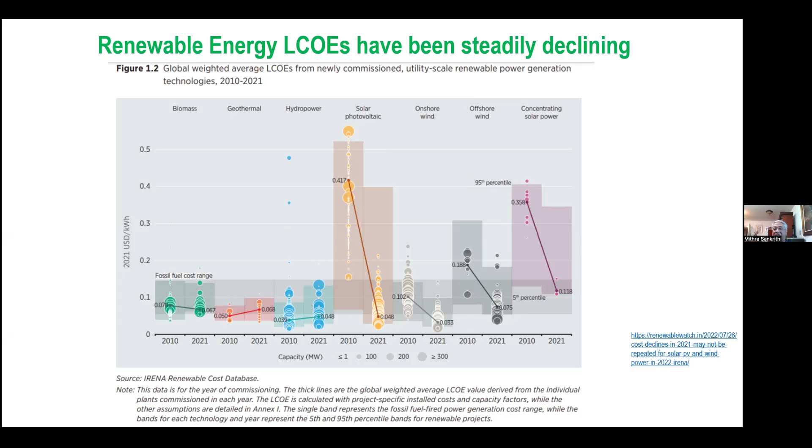Okay, so with that, I'm going to go through a portfolio of 6 of our ideas, and some of them are relatively low risk or modest risk, and some are really deliberately audacious in scope. But I'm hoping that you'll find this thought-provoking, and one of my philosophies, where I'm now a senior citizen, is I really want to inspire the next generation, that's you folks, to think boldly. Don't ever let yourself feel that just because 90% of the people are working on making the next 2% improvement in something, you should hem yourself into that kind of thinking. Think boldly, and you can do great things.

Okay, so the first one is called Super Surya. It's a rooftop solar cogeneration system. The second one, the COS system, or concentrating offshore solar system, is an offshore solar power system. The third one is kind of an interesting niche concept for Arctic communities.

The fourth one is one of these super audacious concepts to actually capture wind energy while thickening ice in the Arctic and Antarctic to combat climate change. The fifth one is a wind energy system, and the last one is a ginormous energy storage system. And we'll get to reasons for each of these and kind of the thought process.

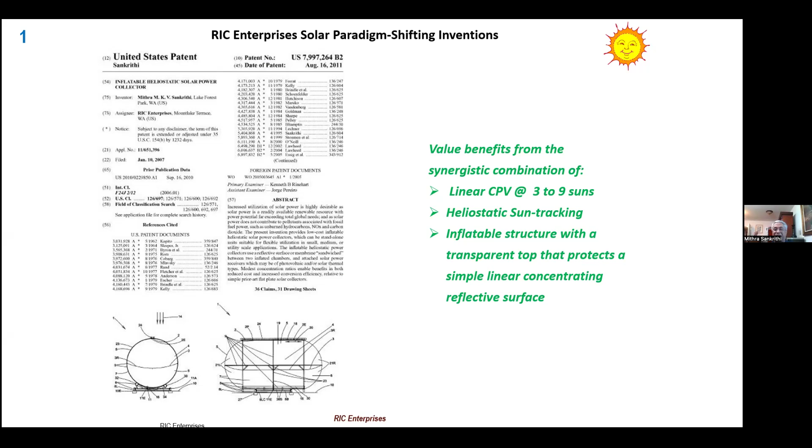And so as an aside, I'll encourage all of you, any of you who have that inventive streak, try and teach yourself how to do that. There's a really good resource called Patent It Yourself, a book that can help you do that if you ever have a mind to do it. And I'm happy to help consult or encourage some of you to do that.

Anyhow, the Super Surya, what's the idea? The basic idea is that solar panels, from the very first chart, we saw that they're already cost competitive. And they're very simple. They have no moving parts. They're very lightweight. They just mount on the roof of a house or a building. They can be integrated with buildings. The biggest challenge with solar panels is their efficiency is really quite low. So a simple silicon solar panel, even with monocrystalline silicon, is around 20% efficiency.

So the sunlight comes in, radiation from the sun comes in at 1,000 watts per square meter all over the world when the clouds aren't blocking it on a nice sunny day like today in Seattle. So that energy of 1,000 watts, if you have a solar panel that's a square meter and pointing directly at the sun, where the power coming in is 1,000 watts, it'll harvest 200 watts. And that's just a fact of life.

So the motivation of this thing is with low concentration and cogeneration, can you increase that harvest from 20% all the way up to 60 or 70%? And how do you do that? So right now, if you ask yourself the question, the energy comes in, what happens to that 80% that you're not harvesting? The answer is it's waste heat at a temperature you can't use. So it'll warm up a little bit, but you can't use that heat.

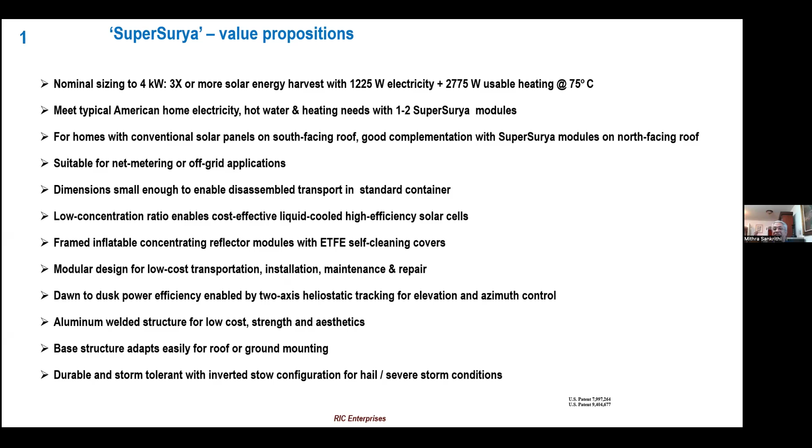So that's the idea. There's more stuff here. We can make this presentation available so you can look at it in more detail later. Let me move this over to this side. We have done some prototype testing, and sorry, I gotta go back.

I have, sorry. This will show my poor WebEx skills or Zoom skills.

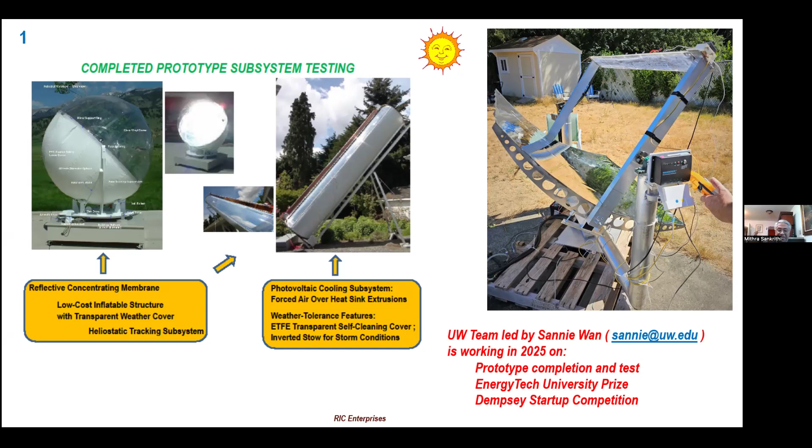Anyhow, so there is a UW team actually currently working on this prototype on the top right. It's headed by an undergraduate student named Sannie Wan, and there's like 5 or 6 students in that team. They're going to complete the prototype, they're going to test it, and they're entering in 2 contests. One is the EnergyTech University Prize, and the other is the Dempsey Startup Competition. So any of you who are interested in knowing more about that, just contact Sannie, and if you want to get involved, certainly you're welcome to do that.

And then in terms of markets, I don't want to belabor this just for the sake of time, but there's significant markets for this all over the US as well as all over the world. And where people conventionally think of solar as, oh, it makes sense in Arizona, but it couldn't possibly make sense in Washington State. My counterpoint is even simple solar panels. One of the largest adopters is Germany, and they're far north of Washington State. And their insolation, the amount of solar energy they get, is lower, and they still use it effectively.

And so, especially with this low concentration, it's almost ideally applicable in places where you need some heating, and everybody needs domestic hot water. But if you need supplemental building heat in places with a cold but sunny winter, think Chicago, it's actually a really good fit. Okay, that's the end on that first concept. I do want to take just a quick pause at the end of each topic so that if people have questions, comments, critique, let's spend just a few minutes on that, and then we'll move on to the next one.

So how much is it estimated to cost for one of these rigs? Oh, so that's a really good question, and I don't have a definitive answer. My arm waving answer is going to be that we hope to get the LCOE competitive with conventional solar panels, but the output is something different, right? Because it's outputting both electricity and usable heat. So that's the simple-minded answer. Since we're still in the prototype phase, it's really hard to get those numbers, and that's part of what Sannie's team is going to work on for their business competition.

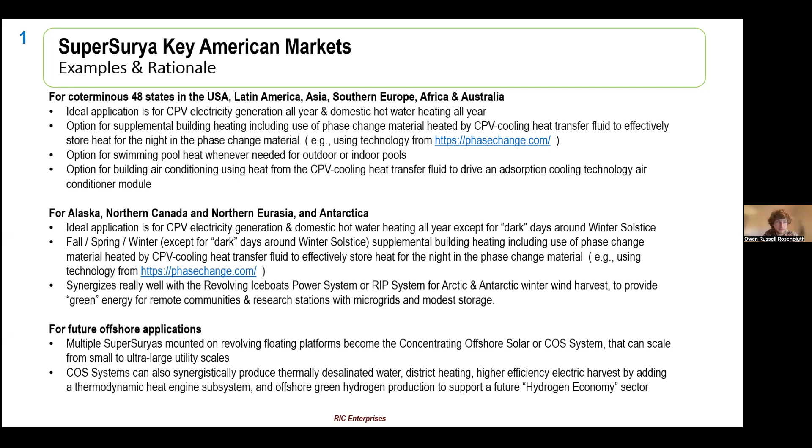Okay. If there's no other questions, let's move on. So the next broad category is this area called concentrating offshore solar systems, or COS systems. And the thought that I want to seed in you folks' minds is if you can go offshore, especially for utility scale solar, it's such a good idea because you don't have the land costs. You don't have to compete for other land uses. Humankind, we're a species that lives on land, and so we need land for homes. We need land for farms. We need land for nature, for forests and fields. And so one of the quasi-legitimate objections to covering thousands of acres with solar plants is, well, you could have used that land for something different or maybe better.

So the broad answer is, well, why not? Solar is equally available over water as over land. Why not do it? So again, it's a devil in the details problem because with water, first of all, you've got to get the system somehow on something that's floating on the water. So that's more expensive. Truth be told, right now, there are starting to be commercial installations of offshore solar, which use just really simple floats with really simple solar panels mounted on them. So nothing magic from a technology point of view. And they're getting implemented in places like reservoirs. But I'm thinking in a grander way.

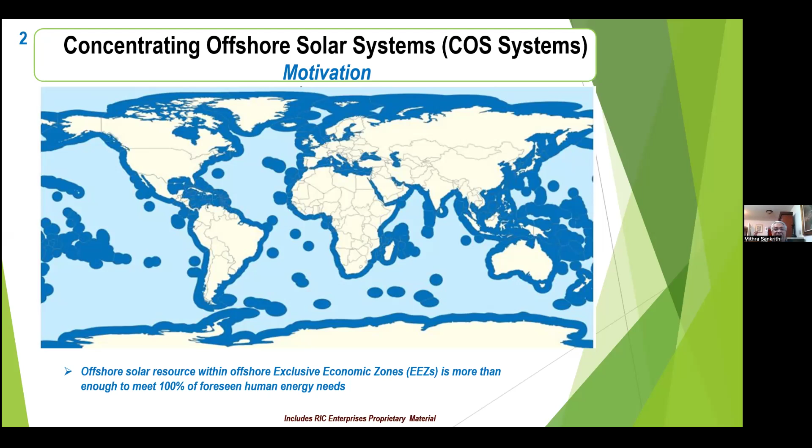Okay. So the concept here is to basically have, if you look down from the sky, a system that looks like a big circular floating array. And you have at least one axis tracking of the sun by anchoring this using tethers to the floor of the lake or the reservoir or the open sea eventually, and using that to track the sun. And then you use something really like the Super Surya technology with low concentration.

And so again, you can get electricity, you can get usable heat, or you can take some of that usable heat and run something called an organic Rankine thermodynamic system to get more electricity instead of heat. So those are all the things you could do.

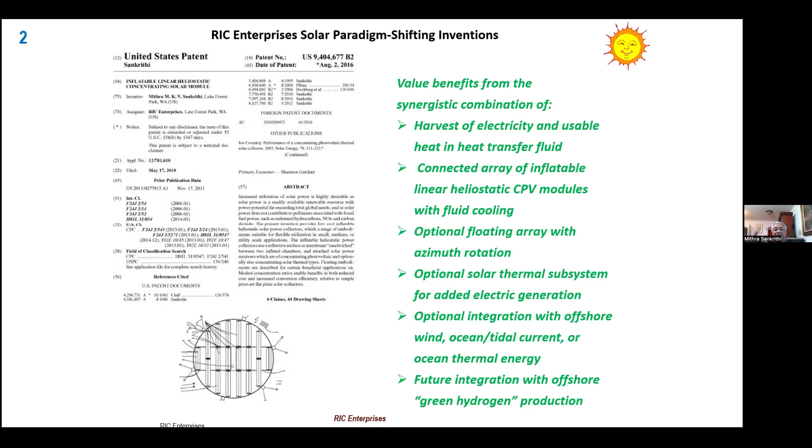And there's also kind of spiral developments of these where you use it for what's called district heating. District heating is a technology that's actually implemented on quite a large commercial scale in Europe. In the US, it's really small. But the idea, again, is if you have this low grade heat at like 70 degrees C heat transfer fluid, you can use it to heat buildings on the shore. And so those are all the ideas of this thing.

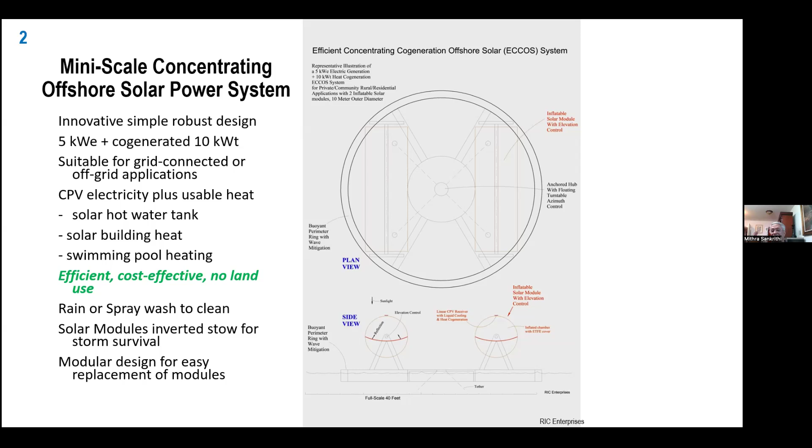I currently have a student at the University of Tulsa doing a capstone project on this COS system, and we'll develop more data on the costs, the value propositions, the technical risks. And the system is also kind of cool in that the basic concept is very scalable. You can have a really small system like this mini scale system and use it for small waterfront property owners or ranches or farms. And then you can go all the way to this 25 megawatt electric system, which can be used to power a coastal city or can be out in the open ocean.

And I'll be the first to say, as soon as you go into the open ocean, there's a lot of technical issues in dealing with just the waves and the storms. One kind of application I thought of that would make a lot of sense is San Francisco Bay. You could implement these in a place like San Francisco Bay, and my rough calculations say you can use 2% of the Bay water area to provide all the energy needed for the Bay Area.

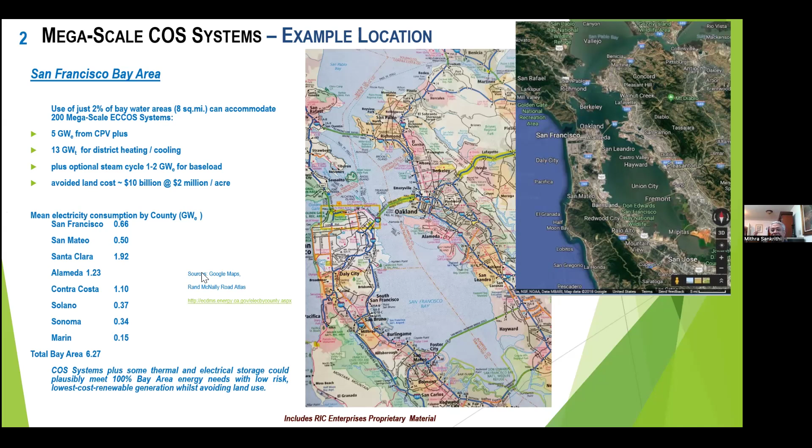And I also did a little kind of thought experiment on really large scale. If you ask yourself the question, where in the United States is the sun the strongest? It turns out the US actually owns a couple of teeny tiny islands out in the middle of the Pacific Ocean on the equator. One is called Jarvis Island and one's called Howland and Baker. And because the EEZ goes 200 miles out from each of these islands, there's actually a tremendous amount of area there.

So in the long term, that area right near the equator, because it's called the doldrum area for meteorologic reasons, doesn't have hurricanes or cyclones or typhoons. And so that's almost a perfect place for, in the long term, generating green hydrogen using solar power and these kind of systems. Okay, so I've kind of blathered on about the motivation of concentrating offshore solar. Thoughts, questions on that?

So I just guess wondering. Oh, you can go on. Go ahead, Maddie. Like how durable would this be? It's obviously in the ocean and salt water, but also just how often would things have to be replaced or repaired?

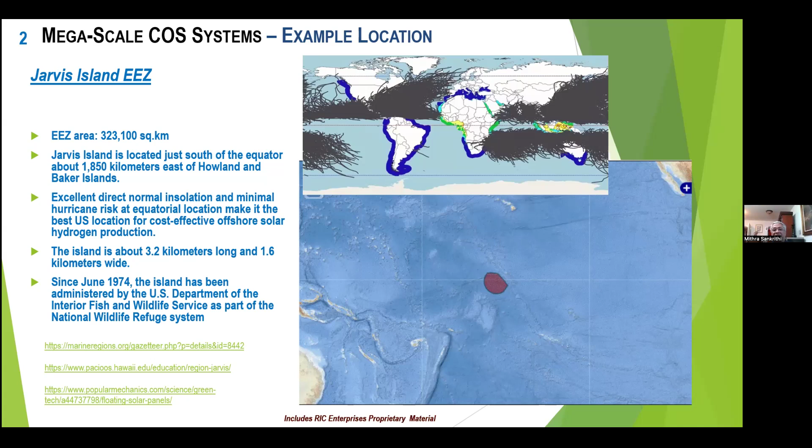It's a super good question. And so the answer really, when I'm going to go back to this mega scale system and talk about something, fundamentally, I think the answer to your question, Maddie, is you have to design in and engineer in a very robust floating platform that can deal with the foreseen wind and wave conditions.

So the wind energy business has already figured out how to do this mostly with their offshore wind turbines, and they're very massive devices. They have rotors that are a couple of 100 feet in diameter, and the foundations for these devices that are mounted out in the North Sea in commercial operation off of the UK and Norway survive really harsh conditions. So it's a matter of good engineering for waves and winds, and clever siting to not locate it where you're going to have, you know, yearly hurricanes.

You don't want it there. But that said, basically the floating platform, well, my guess is it can be a steel structure like a big barge, but it can also use things more clever, like there's material systems that are used in pipes that can float, and you just have to build it big enough. And there is an advantage of scale. The bigger the floating structure, the smaller the wave is relative to the structure.

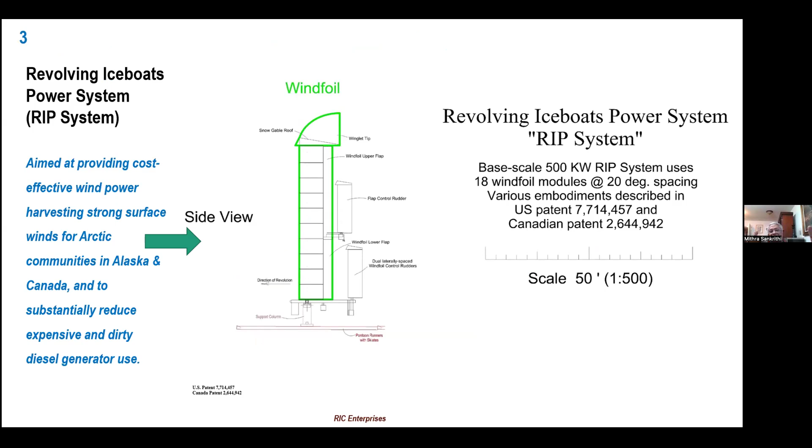And so the idea is then, what if you take a bunch of these ice boats, a bunch of these wings, and put them in a ring and make the ice boats go round and around a ring and run a bunch of generators? Simple concept. We got the patent on it. I've been trying real hard to find a way to advance this.

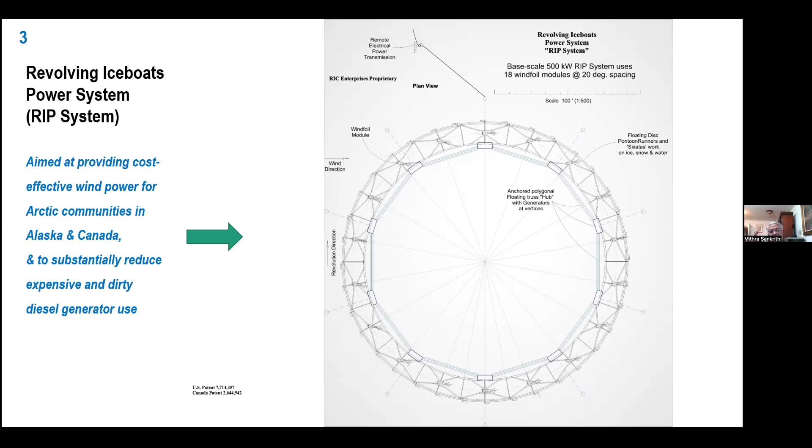Did a project on this with some students from Wazoo. They actually built a prototype. We tested it in an ice arena in Everett. So there's nothing magic about the concept. The concept works. Again, the devil's in the details on the economics.

And okay, as the parent of this invention, it seems real clear to me that it's the best solution for these guys. May not be clear to everyone, but we'll see where it advances and we find an avenue to commercialization.

This is kind of like what it'll look like in an operational system. You have a bunch of these wings that go round and around the circle. There is a little bit of technical trickery because you have to control. I'm an airplane guy, so to me it's not hard. You control the angle of attack of each of those wings as it goes around the circuit in an active control way to maximize the power harvest from the wind.

Any comments, questions about this one? So they're on like a rail system? No, they're all mounted to this ring, and the ring has skates or skis under it. Okay, I see. So the whole system just sits on the ice and rotates. It's like a bunch of ice skaters going in a circle. Got it.

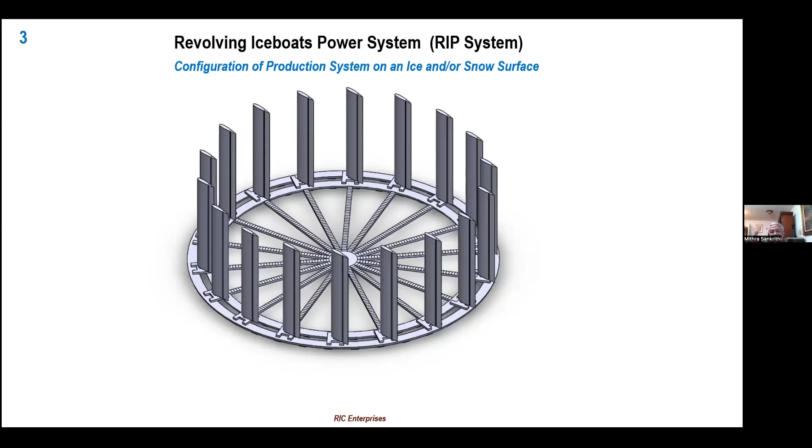All right. And we've done some market analysis in Nunavut and so on. I'm going to skip through that. We're trying to find some small manufacturer or startup company who might be interested in trying to develop and commercialize this. And for what it's worth, if a bunch of students want to put together a company and take a shot at developing it, let me know, and we'll work with you guys.

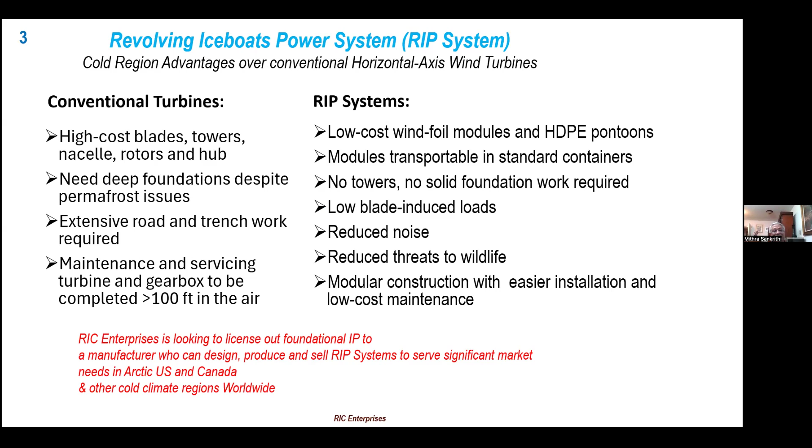Okay. So there's a developed version of this, and this one I'm going to go through a little quickly, but I want to at least share this concept because it's an audacious concept for what I think is an important problem. And this is the same wind energy system, but at a larger scale and out in the sea ice in the Arctic Ocean and on ice shelves in the Antarctic. And it's called ISTRES, or ice sheet thickening renewable energy system. So it harvests the wind energy, probably to make green hydrogen.

But while it's harvesting wind energy, what this system does, it's on a floating sheet of ice in the Arctic or the Antarctic. It uses some of that energy in the winter to pump water from under the floating ice and either drip it like a drip irrigation system or spray it like a snowmaker in a ski area on the surface. And the idea is you keep running this thing every winter and you'll wind up actually thickening sea ice or thickening ice shelves while getting renewable energy. And to me, that's a win-win proposition.

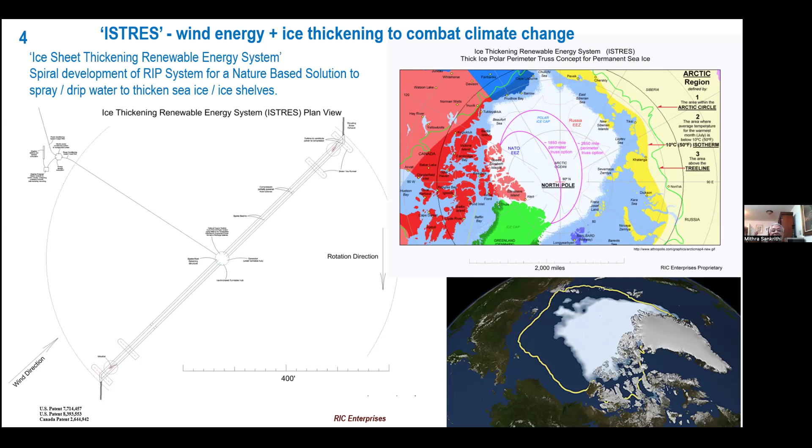This is kind of the idea: you have a whole array of these things and build a beam of thickened sea ice or thickened ice shelf. That's the basic concept. And what's the value? Well, you harvest the wind, you thicken the ice to combat climate change, which is melting sea ice in the Arctic, and it is also melting the ice shelves in the Antarctic. So it's a nature-based solution. And so I really am pretty jazzed about this.

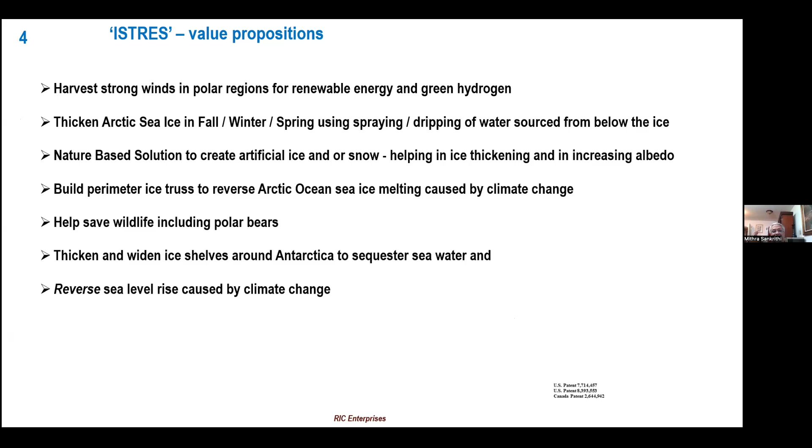I was excited about this problem, and this is not to be overly dramatic, but I do want to share this little quiz question that I heard many years ago. It was probably 2 decades ago by a gentleman named Dennis Bushnell, who at that time was chief scientist at NASA Langley.

And he was giving this presentation at a conference. This was long before climate change became an in thing or a hot topic that the whole world is discussing. But Dennis was ahead of his time, and he was very much a visionary. And so he asked us a quiz question.

He asked the audience. He said, "Well, IPCC 4 experts said that for climate change scenarios," and this was 20 years ago, "if the world's temperature rises 2 to 4 degrees C, the sea level can rise 0.2 to 0.6 meters by the year 2099." That was their forecast then.

It's worse now. So he said, now you smart scientists and engineers in the audience, suppose the actual temperature rise is a lot worse than the 2 to 4 degrees C. Suppose it was 6 to 10 degrees C. How much do you think the sea level would rise? So that was his quiz question.

If you want to take a shot, if you don't already know the answer to this. I'm gonna guess it's more than like 1.2 meters. More than 1.2 meters.

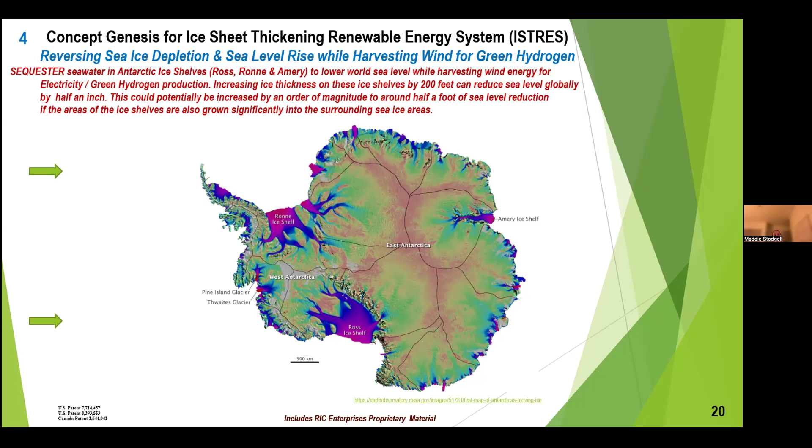That's really cool. I didn't even, yeah, that's my comment. Yes. Okay, thank you. I appreciate it. All right. Okay, I think we're doing okay on time.

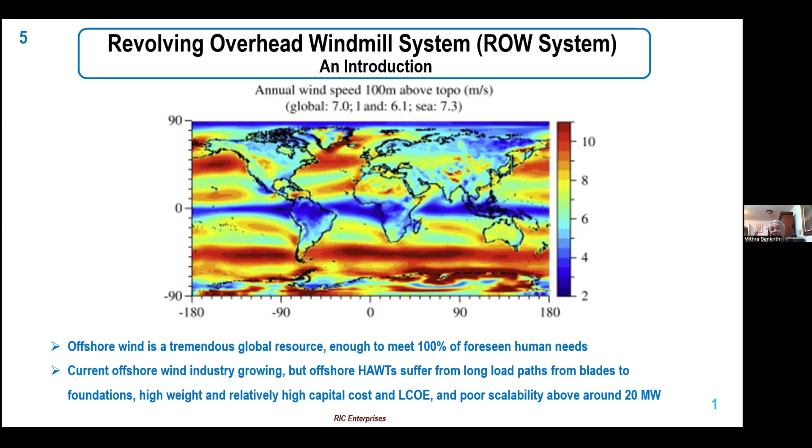Then the next one is called the revolving overhead windmill system. It's very similar to that revolving ice boat system, but this is just intended to say wind, like solar, there's enough wind in the world, offshore wind, to meet 100% of foreseen human needs. And like the revolving ice boat system, the idea is to use these vertical wings or sails to harvest that wind by making it go in a circle. So it's very similar, but instead of the conventional offshore wind turbine, I think this is a better solution.

And I'm currently mentoring a UW senior, Arjun Subramanian, who is doing some modeling in CAD and FEA to flesh out the concept. We're going to present this at a conference of the American Society of Mechanical Engineers this summer. So this is an architecture for offshore wind that in my mind will have a lower LCOE than current offshore wind turbines, and has some other advantages also, like lower risk to seabirds and marine life, lower noise, and the ability to scale up to a larger scale.

So I might be out of my area of expertise here, but I've seen helical wind turbines that are standing. They use a helix, so any direction of wind that you hit it at, it will spin. What's the advantage of something like this versus an array of helical turbines?

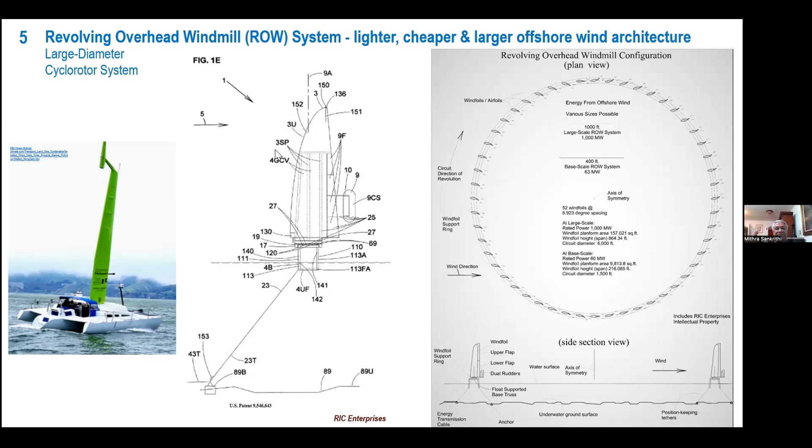All right. Let's go on. I think we've already talked about the value propositions in this and where we're going. Okay. Sixth and last one is arguably my most audacious idea, and I hope if you take one thing away from this it is be bold in your thinking. Don't think your ideas are stupid. All ideas have to go through a long maturation process, and you have to be able and willing to receive critique, and methodically work through it. But be bold in your ideas and explore them.

So this one has to do with energy storage. And I'd like to introduce that subject by saying, why do you need energy storage?

Fundamentally, if we're going to go from an economy that basically burns fossil fuels to provide energy, electricity, say, to something that depends on solar and wind, the problem is both solar and wind are pretty intermittent. So for solar, for instance, we know we have it in the day, we don't have it at night. So if consumers need electricity at night in a modern society, you need to store that energy from the day to the night. Similarly, in wind, some days you have a lot of wind, some days the wind is pretty idle, and so you're not generating. Again, you need storage.

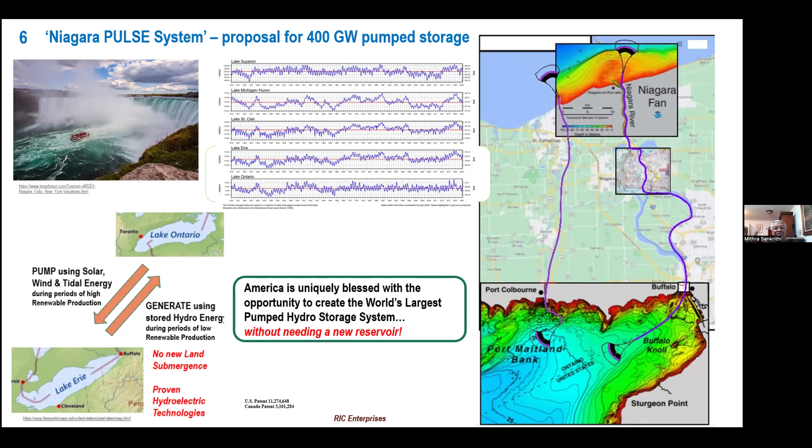So it turns out there's this clever scheme. I'll get back to this first chart, which kind of says everything together. But the motivation is how much energy do you need to store? Back when we had the last administration, which had this very ambitious target of 100% carbon pollution-free electricity by 2035. The current administration certainly would not support that. But whatever the timescale is, if you do the thought experiment on if we ever get to 100% carbon pollution-free electricity, how much storage do you need?

The National Renewable Energy Lab, or NREL, did a study on this, and the answer is a pretty broad range, but the numbers are really mind-boggling. So they say for diurnal storage, you need to add somewhere between 120 and 350 gigawatts of storage, and for long duration between 100 and 680 gigawatts; they studied several different scenarios. So the total medium to long duration storage is in the range of 220 to 1,030 gigawatts.

Keep in mind, what's a gigawatt? 1,000 kilowatts is a megawatt. 1,000 megawatts is 1 gigawatt. So it's a lot of power. A gigawatt is 1 billion watts. Okay. So when you say you want to go to a large amount of renewable energy storage, what are your options? It turns out a lot of people don't realize that the world's current largest amount of energy storage is actually using pumped hydro.

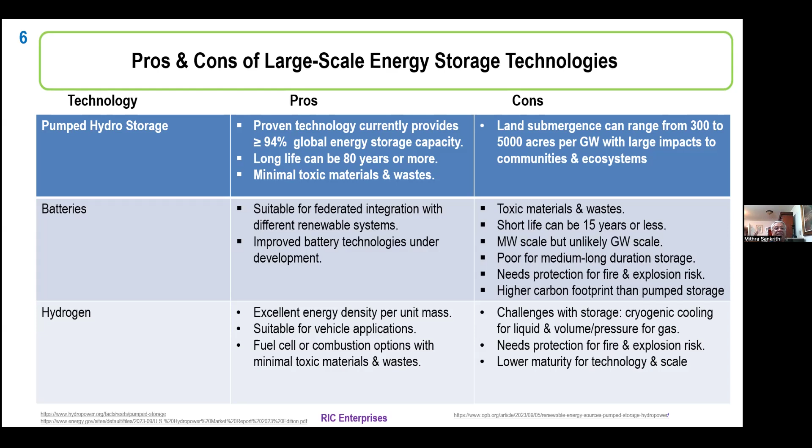So what is this concept? And the concept itself is super simple. It turns out that the biggest objection to pumped hydro is typically for any new hydro installation, you have to build a dam, you have to dam a river, you're going to flood a large area; several hundreds of acres are going to go from land to being underwater. And so the environmental impact is very large. And that's one of the biggest reasons why you don't have new pumped hydro projects happening in the US. They're still happening in other parts of the world, in China and India and other places. Lots of hydro projects still going on.

So here in the US and Canada, it's almost like there's an amazing God-given thing where you have two bodies of water, Lake Erie and Lake Ontario, that are separated with 99 meters of vertical elevation, with Niagara Falls in between. And so this was my aha moment, which happened a few years ago. And I said, wowie zowie, to meet those kind of enormous energy storage needs, why don't we find a way to take some water from Lake Ontario when we have excess power, pump it up to Lake Erie, and then at night, when the wind isn't blowing, run it the other way through a bunch of turbines.

And I've actually done a bunch of work on this. I mentored a project at Columbia University where the students did quite a bit of work on it. We presented at an international conference in Windsor, Ontario last year. And so I have pretty high confidence in these numbers.

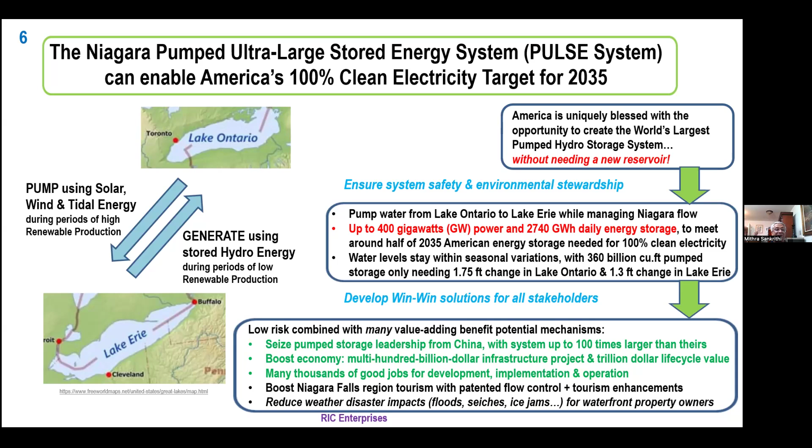So this is, I think, definitely an audacious proposal, but it would allow you to meet half of the U.S. energy storage needs. The world's largest pump storage system now is in China, and this would be 100 times bigger than that. And in my mind, it would boost the economy. You don't have to condemn a bunch of land. Does it have issues? Of course it does.

One of the biggest technical issues is how do you build that giant water pipeline that connects the lakes underground? So it would be the largest tunneling project in human history. Can it be done? We've talked to some companies that have innovative mining tunneling approaches. So overall it's a concept way out of the box, but why not?

All right, I think I'm done. So sorry for a little bit of a fire hose, but I hope you guys at least find it thought-provoking and interesting, and also encourage you to think out of the box on solutions to all kinds of problems we humankind face. And when you look at things from a historical perspective, I'll tell you, having worked in aerospace for many years, if you look at the difference between where the Wright brothers were with their airplane and a 747 flying today, in less than 100 years, the technology change and the solution change is totally mind-numbing. And so each of us can be the architect of the future, and we should try.